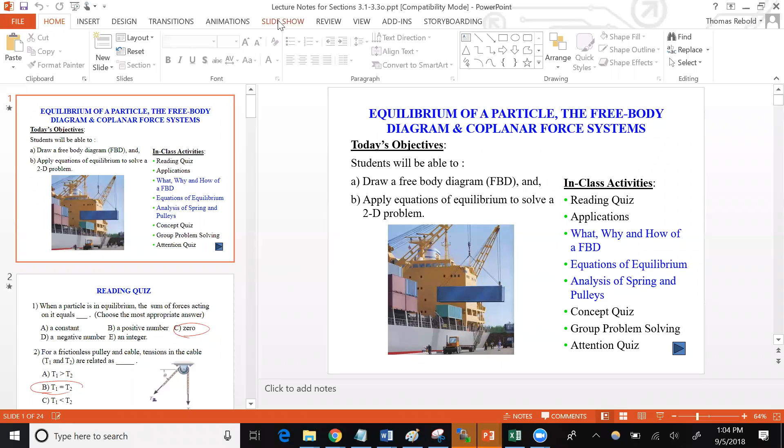Also he's got a computer engineering degree - he got an extra degree in computer engineering or something like that because he needed that for his work. So anyway, he's a great guy that talks about all the decisions you have to make in your educational pathway, all the decisions he had to make, and how he got to where he is now.

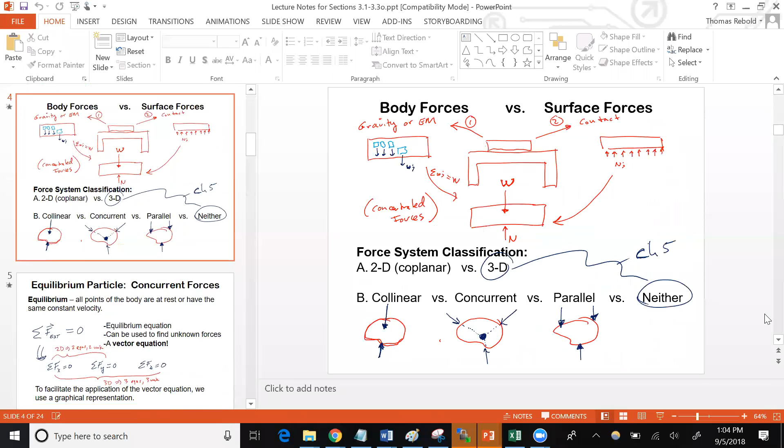So we were working on this stuff yesterday. We were working on equations of equilibrium. We were working on free body diagrams. We got to the point where you should have a pretty good sense of what we're doing on these free body diagrams. And now we're going to solve a couple problems.

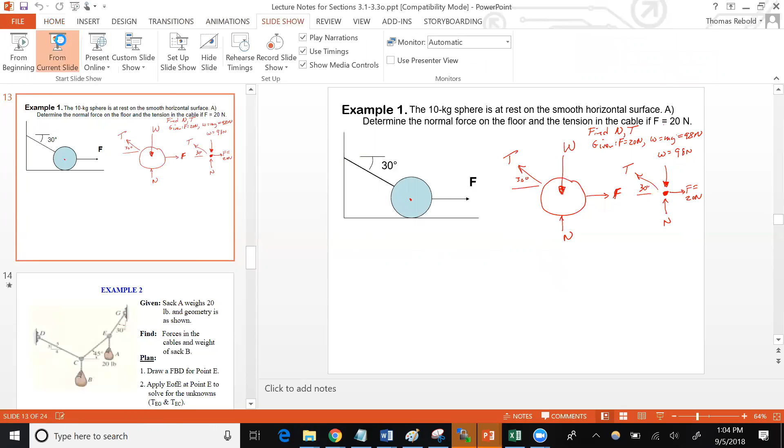We kind of got started on this one. This sphere that's sitting on a floor, being pulled, and you can kind of guess, as F increases, what's going to eventually happen to the sphere. It's gonna come off the ground.

Yeah, it'll start to lift up in the air, right? That means the normal force will be getting smaller and smaller. As F increases, the normal force should be getting smaller because it's not needing to push back as much. It's fun to just reason through these things, visualize what happens if F increases, and you can see that thing lifting up. That can give you some insight into the answer you get, whether it's correct or not.

So we ended up getting this whole free body diagram thing down, and now you can see what we did. We started with a description of the problem. We wrote this free body diagram, and then we idealized even more, so it became just this - the actual sphere was just this little dot, at which we can do all of the equations of equilibrium.

That is a force system where all the forces are either pointing to or away from a dot. What do you call that? Concurrent force system, yeah. And it is at rest. So because it says it's at rest, that means we call that equilibrium.

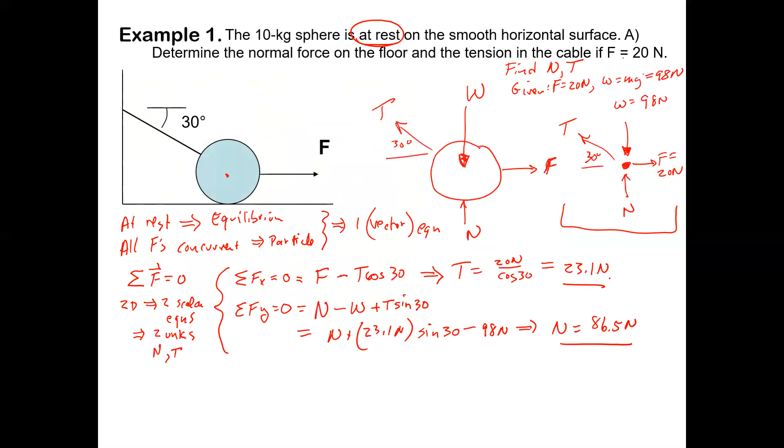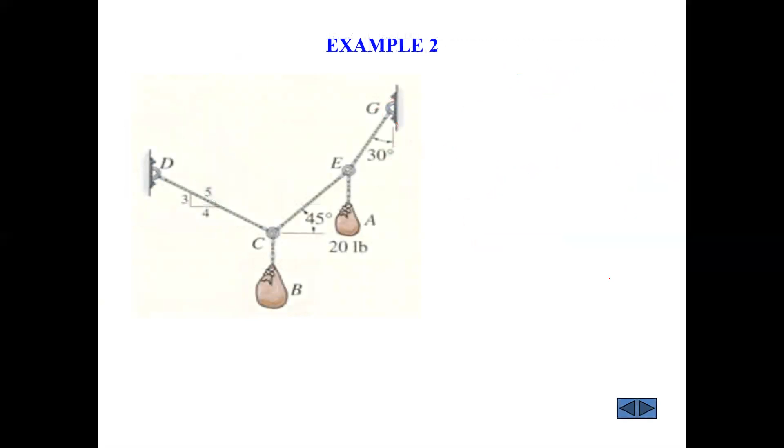So that's a pretty straightforward one, but you can get problems that require a little more reasoning in them, right? So this is sort of an interesting problem now where you've got two sacks hanging up here, and sack A weighs 20 pounds, and they're giving us all the angles, but those angles of those sacks and stuff are only going to be true if sack B is a certain weight, and we're asked to find the forces in those cables and the weight of sack B.

So the thing about this is it's a 2D problem, but it seems like, well, how many cables are there? How many, the forces in the cables, besides the cables holding up the bags, just these horizontal or these other cables, right? There's 3 of them, right? There's CD, CE, and EG. That's 3. And then there's the weight of the bag B, that's 4 unknowns.

But this is a 2D problem. I told you you can only solve for 2 unknowns in a 2D problem. How are we going to go about finding these 4 unknowns when we only have 2 dimensions? Kind of interesting situation, right? Is there a way to do it?

Well, it's kind of like solving a crossword puzzle. You know, you can kind of work on this part of the problem, and then, you know, you get this word, and then that kind of helps you figure out what that word is, or Sudoku, whatever. For instance, well, there's 2 points of interest on this problem where you could write. Scott, question?

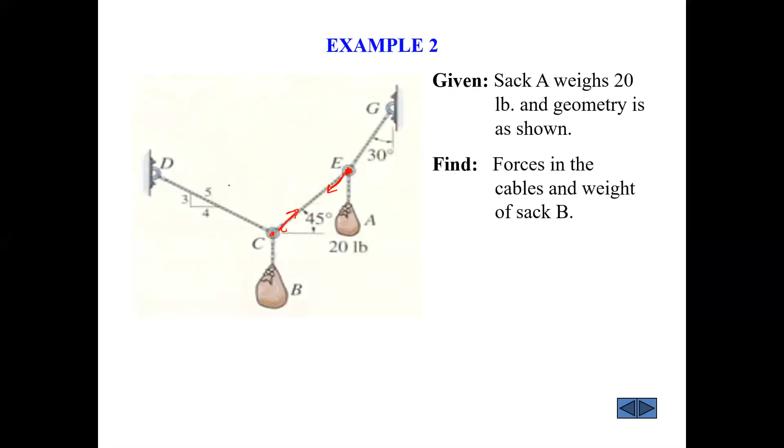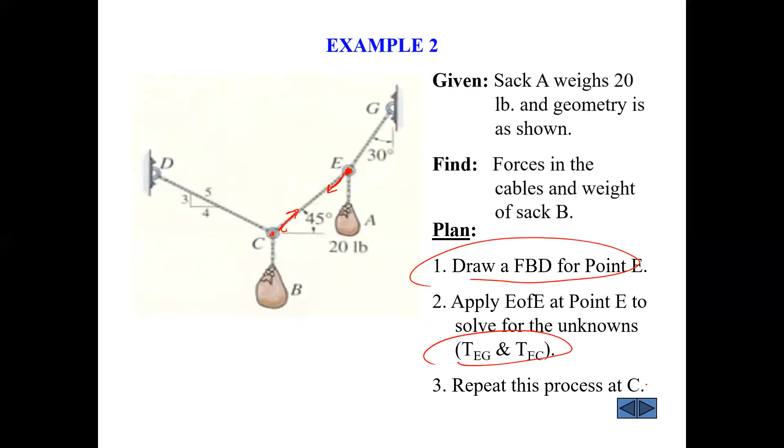So that's the overall plan. We want to start at the point where we can solve for the forces, and we solve for these 2 forces, and then you repeat that process at point C. So it's a multi-step process.

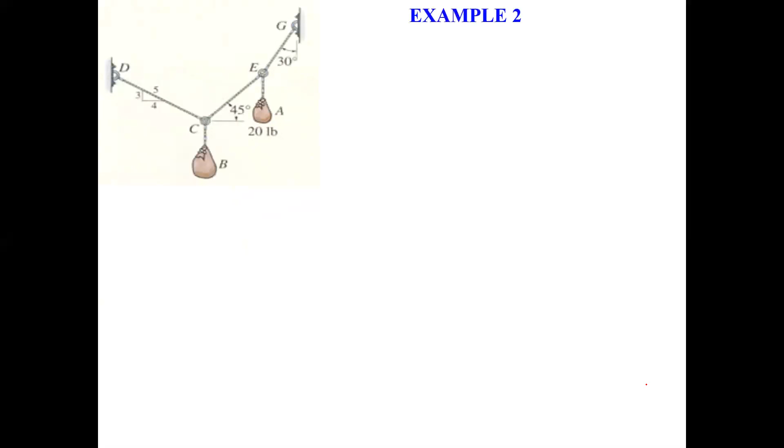So the free body diagram, let's see here. What am I doing? I don't know if I have that. We can certainly do it. So the free body diagram. Oh yeah, there we go. Okay good, so we start with the diagram at point E.

And the diagram at point E is going to have a force going downward of the weight of that sack, which is 20 pounds. This is E. We're also going to have TCE pulling us down and to the left at a 45-degree angle. We should label that 45 degrees here.

And you also have this TGE pulling us up. It has a 60-degree angle to the horizontal, 30-degree to the vertical.

Okay, so now we basically can write the equations of equilibrium. So the equations of equilibrium are going to be sum of the Fx equals 0. And you know, I want you to, when you solve these, I want you to write that.

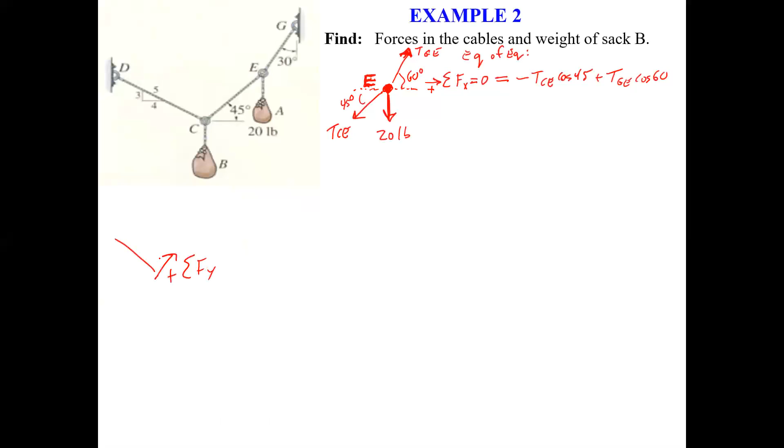That's what you're considering a positive direction in your equation. Sometimes it's convenient to do it in the opposite way. Sometimes if the problem is sort of a tilted thing where you've got some stuff on a plane, you might have a positive x going this way. If the whole problem is angled in a way that makes more sense to look at it that way. When we work with friction problems, sometimes that's the case. This is a very good habit to get into in your work, to make everything clear out in the open, what you're trying to do there.

So that's the Fx equation. You can do the same thing for Fy. You can put a vertical arrow with a plus sign by it. That's going to be what we're calling positive y. Adrian, you want to give me a vertical force?

The vertical force at point E on this diagram, there's only 3 forces. I've labeled the tension, so you see this diagram here at E, and there's this arrow, this arrow, and this arrow. They all have vertical components to them, right? So give me one of those forces. Give me the vertical component of one of those forces.

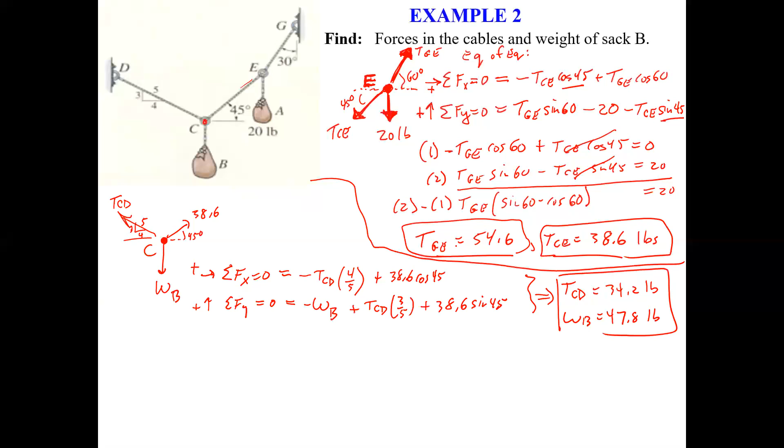So that's the extent of what we're doing for the most part today and tomorrow. Except we also are going to be doing this in 3 dimensions as well. 3 dimensions gets a little more challenging.

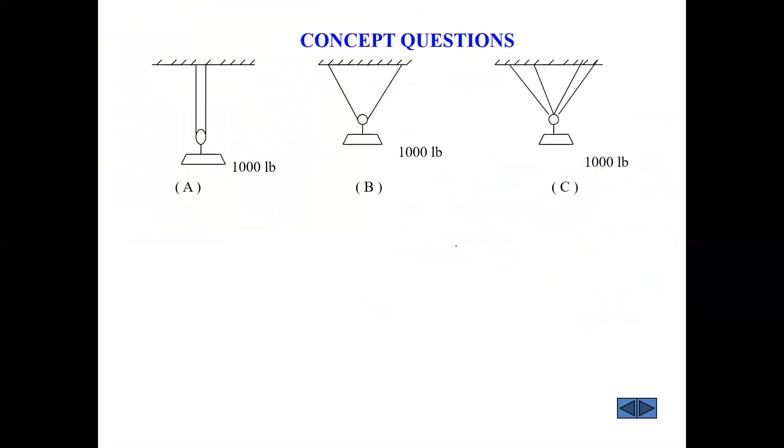But before we do that, let's try a concept quiz. What's the question? Assuming you know the geometry of the ropes, you cannot determine the forces in the cable in which of the system above. And just assume, I guess I'm trying to figure out what these things are. I think this is a pulley. And here you have a pulley like this. Here you have a pulley where the string is like that. And here you have apparently a pulley, or maybe it's a ring. Let's just assume it's a ring. And these are just knots here. Which system can you not determine the forces in the cable?

C, right? How come? Because you got too many unknowns. It doesn't mean it's going to fall. It just means you don't really know what the forces are going to be when you got 4 wires hanging up there, right? You can't really figure that out. You can figure it out in this one because you can do the equations of equilibrium here, and you've only got 2 unknowns. You can figure it out in this one. You're going to have to add up to 1,000. But in this one, you've got, if you've got 4 vectors like that, there's no way you're going to be able to solve the equations of the 4 unknown vectors like that. You're not going to be able to solve, right?

Too many unknowns. You can only do 2. You can only do 2 at each point in a problem with a particle in equilibrium. So the answer is there are more unknowns than equations for C, right? Because you only have 2 equations and you're going to have 4 unknowns there. So it's really easy to, this is called, that's over-constrained, right? It's an over-constrained system, right? When you have like 4 unknowns but only 2 equations.

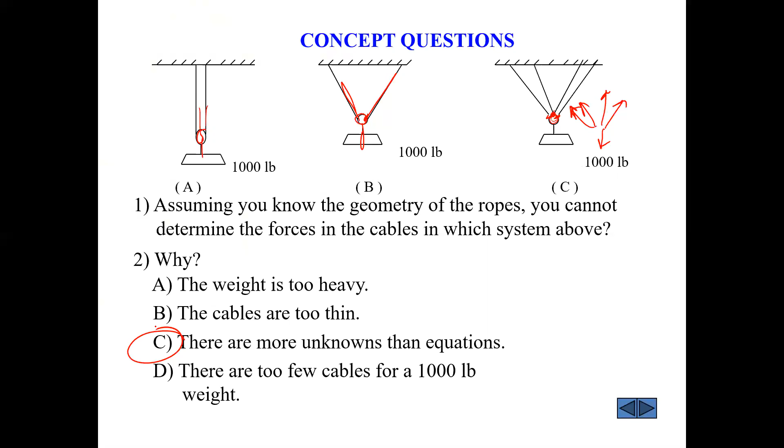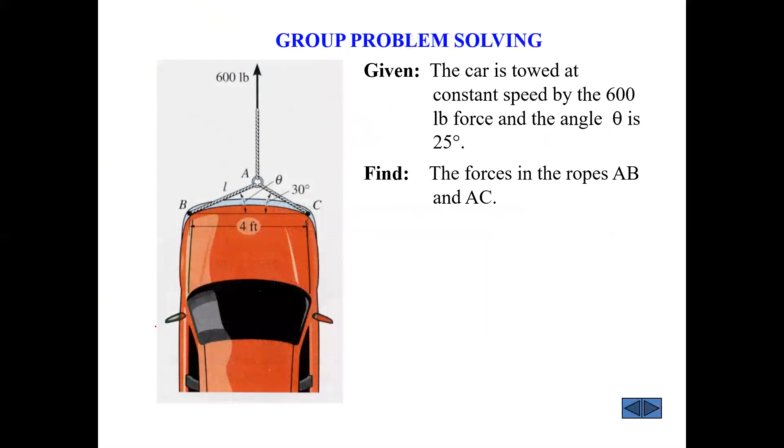You got this one, right?

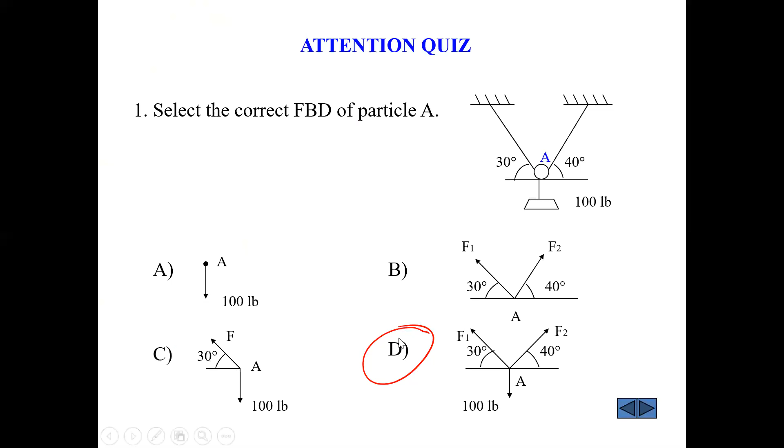So the second section is section 3.4, and in this section we bring in the third dimension.

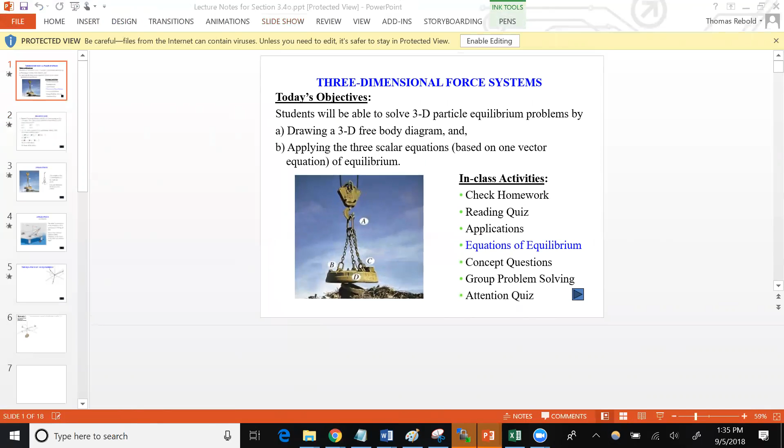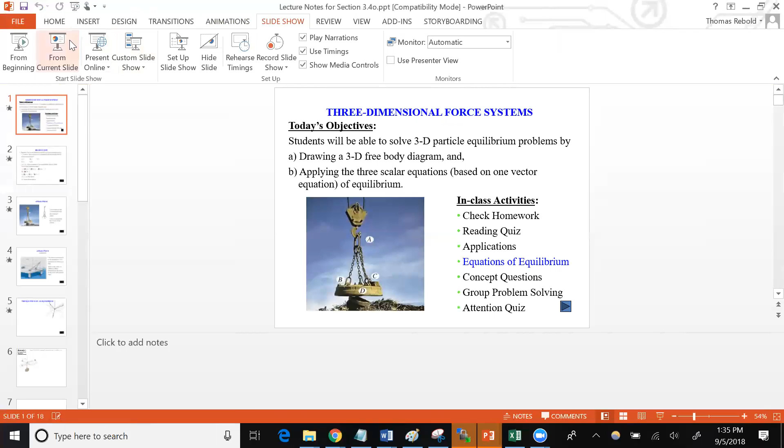With the third dimension, you've got to deal with just another equation, basically. When you have 3 dimensions, if you have a particle in equilibrium and you have 5 forces acting on it, how many scalar equations of equilibrium can you write for point P? Here's the force, here's the particle, you've got forces acting on it in a lot of different directions. How many equations of equilibrium can you write for that? Three. The equations basically depend on how many dimensions you have in the problem, and since we only have 3 dimensions, you can only write 3 equations.

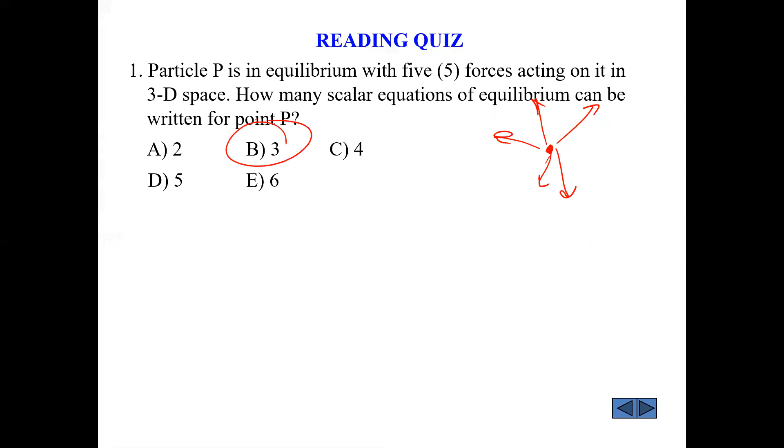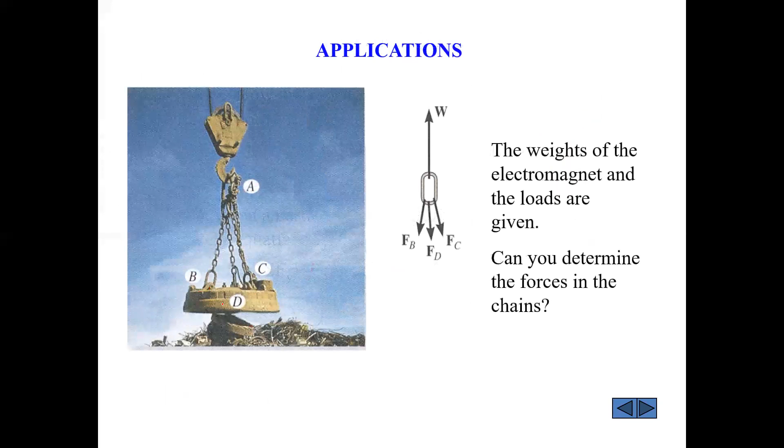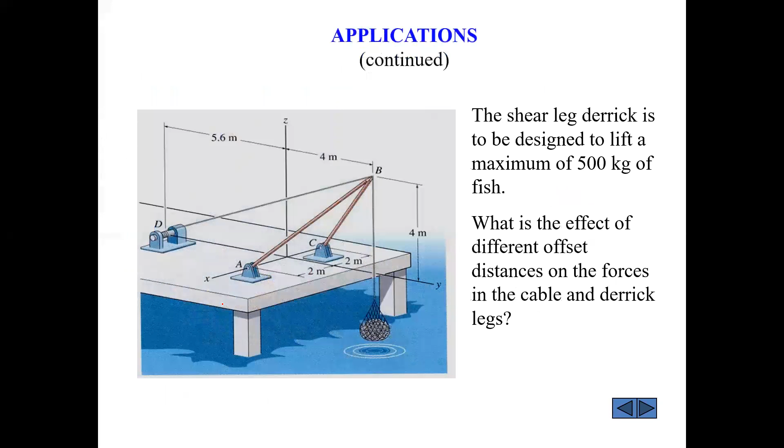So more generally, you have 3-dimensional systems. You have to be able to figure out the forces and the load. Here's another 3D system, and you've got to write equations for those. So the equations in 3D equilibrium...

are that the sum of all the vector forces has to equal 0. And that means, as we already saw, the sum of the Fx's in the i direction plus the sum of all the forces in the y direction plus the sum of all the forces in the z direction has to equal 0, or the sum of all the Fx's equals 0, sum of all the Fy's equals 0, sum of all the Fz's equals 0. So it's either that one, or that one.

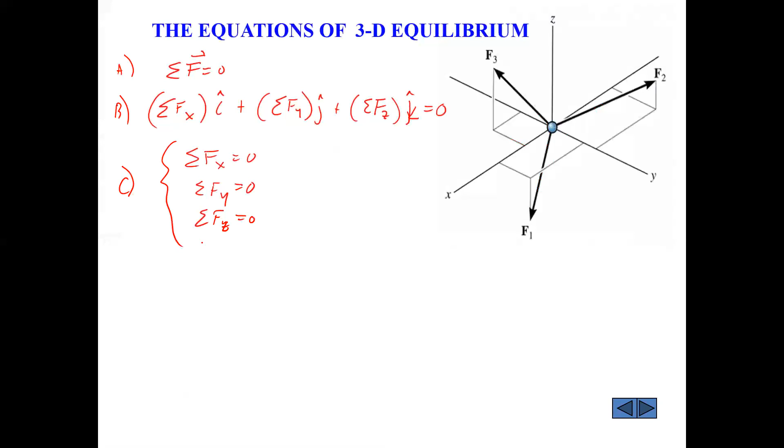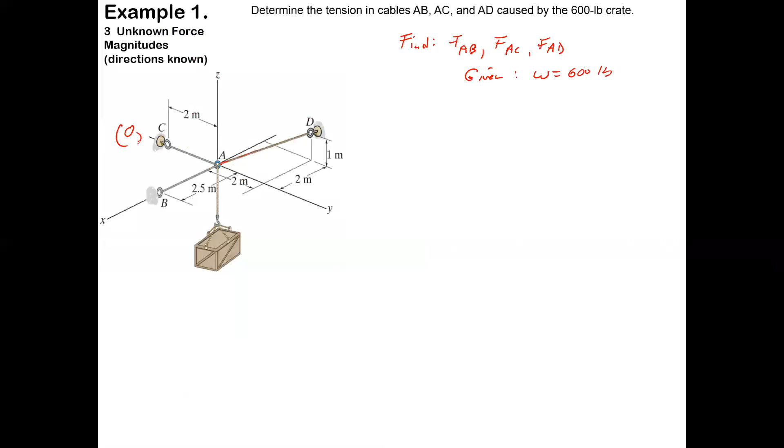We know point C is located at x is 0, the y is -2, and the z component is 0. We know point B is located at 2.5, 0, 0. And point D is located at -2, 2, and 1. We're going to need that.

The free body diagram is going to show you - you need to write these 3D ones here, which is kind of fun. Here's X, here's Y, Z. Oops, I think I messed that up. Yeah, and this is the cable. Let me change the color here. So you're going to have one force going this way, you're going to have one force going that way, and you're going to have one force going this way.

FAC vector is just going to be the magnitude of FAC times the direction. What's the direction of FAC? What's the direction vector for that? It's minus j hat, pointing along the minus y axis. What's the direction vector for FAB? It's i hat. So it's just unknown magnitude times i hat, and unknown magnitude times minus j for FAC.

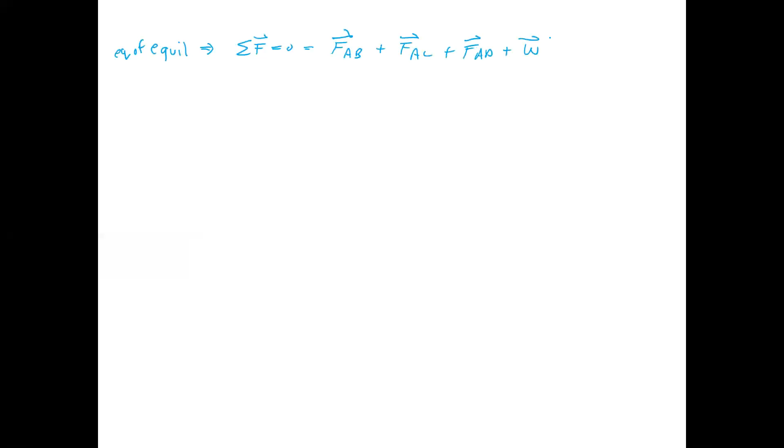So FAB vector plus FAC vector plus FAD vector plus W as a vector is going to have to equal 0. That means 0 is going to equal, and you can basically write these out as vectors. FAB vector is just FAB magnitude times i hat. FAC vector is just FAC magnitude times minus j hat, as we saw already. FAD vector is FAD magnitude times UAD, which is minus 2/3 i plus 2/3 j plus 1/3 k. And then W is just going to be plus 600 times minus k, the direction of that weight. So you have one big vector equation.

We're going to basically group all of the i, j, and k terms together. So all the i terms are going to be 0 equals FAB minus 2/3 FAD. This one right here.

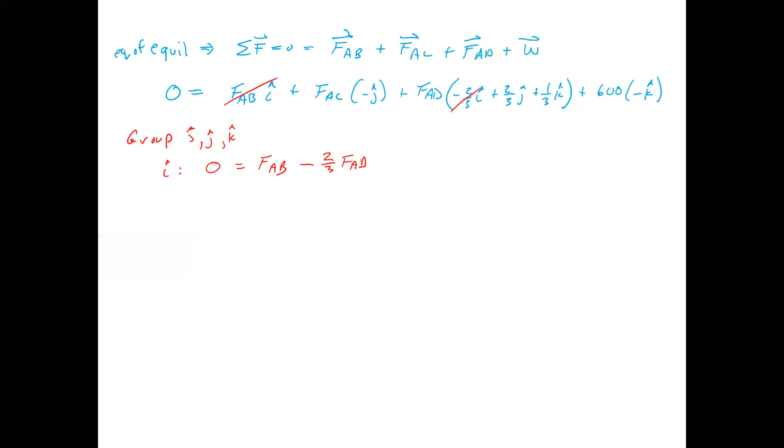For the j terms, we're going to have 0 equals minus FAC plus 2/3 FAD.

And for the k terms, we're going to have 0 equals 1/3 FAD minus 600 pounds. So this last one tells us that FAD has to be 1800 pounds. These tend to fall together pretty quickly, just solving for that one unknown there.

You can then plug this into these two equations, and you'll also find that FAB is going to equal 1,200 pounds, and FAC is going to also equal 1,200 pounds.

So what's interesting is that 600-pound crate is creating a lot of force in those cables, 2 or 3 times the amount of the weight of the crate itself. Why is that? Is it reasonable to think that a 600-pound crate is going to require 1,800 pounds of force in a cable to hold it up?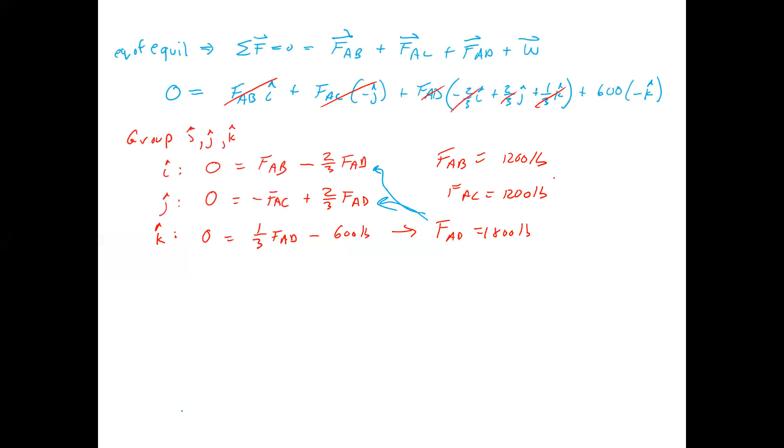Yeah, it will if they're acting at an angle, right? If you want to reduce the force in the cables, what would you do? Yeah, if you just made it vertical, you could just hang it. You could hang that crate from one rope straight up and it would only have 600 pounds on it. But it might not look as cool. I think it looks cooler to hang it this way. I would hang it this way if it was in my room. It's more interesting. Scott?

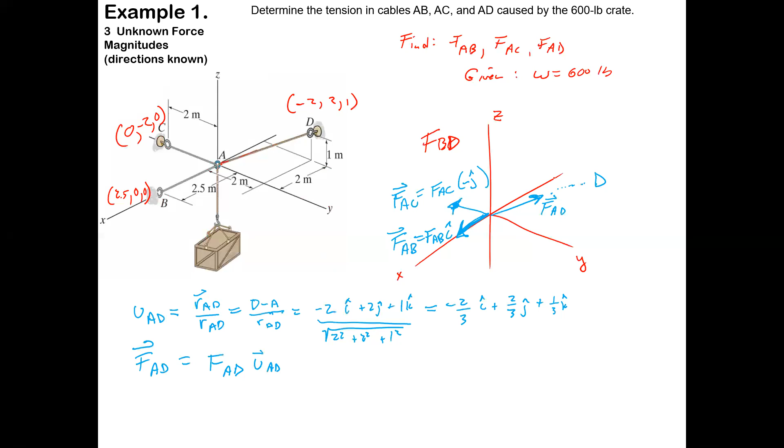They're horizontal, or pretty much all horizontal, yeah. So this ratio here, from here to here, is 1/3. That means this has to be 1,800, because this is the only thing providing the vertical force holding up that box—this vertical part of FAD. So this 1,800 is scaled by 1/3 to get to 600, which is what we need to keep that box aloft. So if we lowered point D even further, the force would get even higher in that cable.

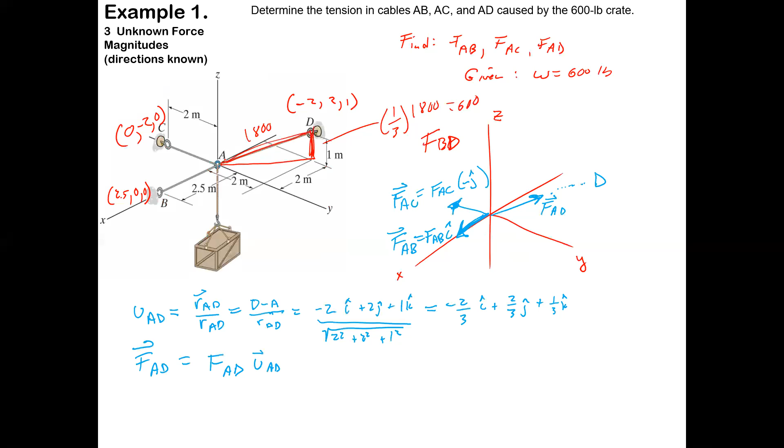And if you tried to put point D on the XY plane, the force would go to what? It would go to infinity. You couldn't hold it completely vertical with 3 horizontal forces. You couldn't keep it from falling. It has to sag at some point, otherwise the cable would break. Yeah, it's kind of interesting stuff.

Concept quiz: when you know the direction of a force but not its magnitude, how many unknowns correspond to that force? One. Anybody else? Yeah, because if you know the direction, you know the ratio of the different components. You just have to know what the magnitude is to find them. If you find the magnitude, then you can find all 3 components once you know the direction. So there's only one unknown.

If a particle has 3D forces acting on it and it's in static equilibrium, the components of the resultant force of all the forces acting on it, in equilibrium, has to be what? A, B, C, or D? B, yes. Individually, these components have to sum to 0. It's not that the three added together have to sum to 0. This is actually saying fx plus fy plus fz equals 0 — that doesn't make sense. That doesn't make sense either. Yeah, it has to be B.

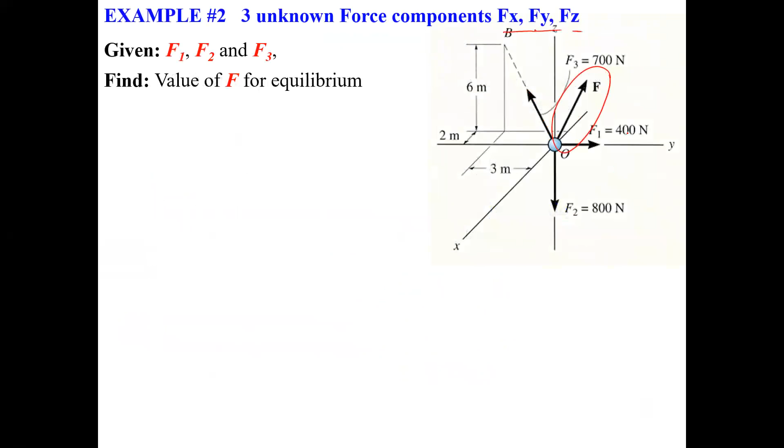Tomorrow we're going to do this problem where you have only one unknown force, but it has 3 unknown force components: fx, fy, and fz. This one force, F, has to make this whole thing in equilibrium. We're going to figure that out tomorrow. And then we'll do in-class concepts.